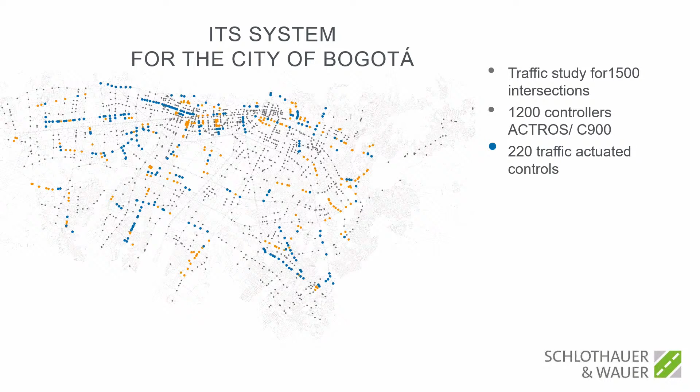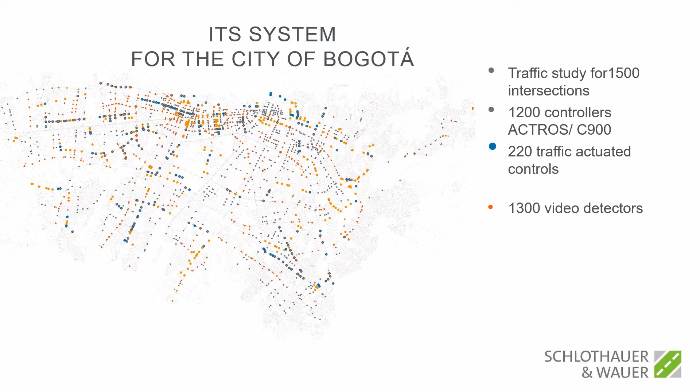The result was 220 traffic actuated controls and 1,300 video detectors, and also 50 coordinated corridors, which belong to 58 adaptive networks that are controlled by INES, which is the topic Torben will explain to you. So go ahead, please, Torben.

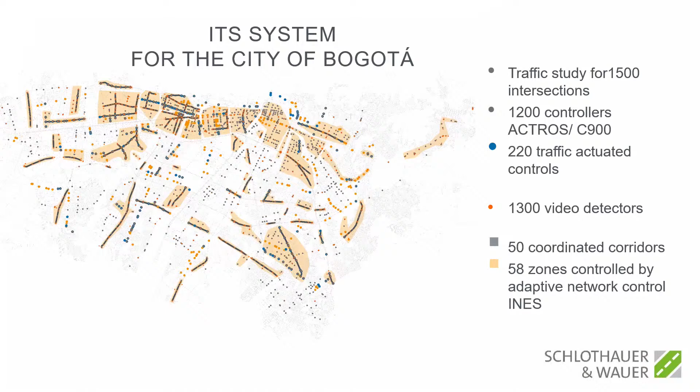Thank you very much for that introduction to the project. I also want to sum up a few challenges again that we were facing during the project, or that were also presented to us, which we had to deal with.

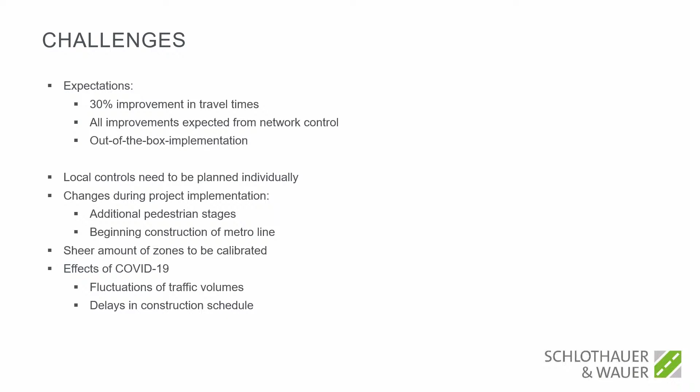First of all, there are the expectations of the client. As in many cases, when it comes to expectations towards a network control, there are some numbers circulating around the world of traffic management. We say that you could reach improvements of up to 30% just by re-regulating the traffic. This is an expectation that can hardly be met, except maybe in the case where the original state of a city was so badly managed that it's quite easy to make an improvement.

But as we know, and also if we see the situation in Bogota, the real problem of the city is a highly oversaturated network, and a public transport sector that still needs to be extended significantly. Anyways, we have to deal with these expectations and manage them over the course of the project.

At some point, the client is also expressing an expectation that a network control or intelligent traffic algorithm could provide something like an out-of-the-box instant solution, like buying an iPhone, connecting it to power, and a whole new world begins from the start. What it actually means to optimize traffic in such a big metropolitan area is hard and detailed work on the local controllers.

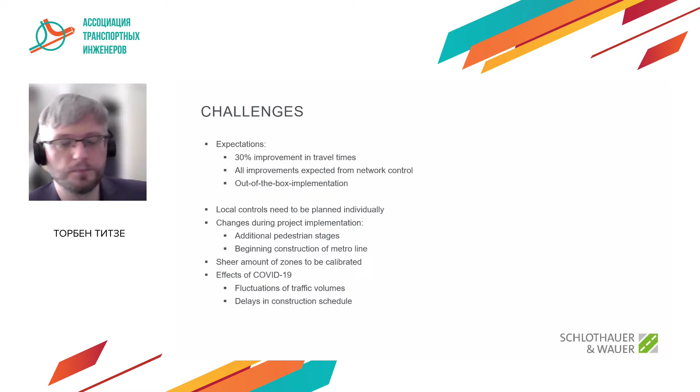So these are the challenges. We need a flexible system. We need a system that can also be worked with by local engineers. So how does our system adapt to these challenges? In short, what is INES? We will not go into all the details of what INES does and how it does it. I will just give a short overview of what it usually does and what we did, especially for Bogota.

INES is an adaptive network control system. Its main part is an automatic plan selection. It also does green time redistribution if the local control is supporting this. It's responding to congestion if we have speed detection, which of course in Bogota we had.

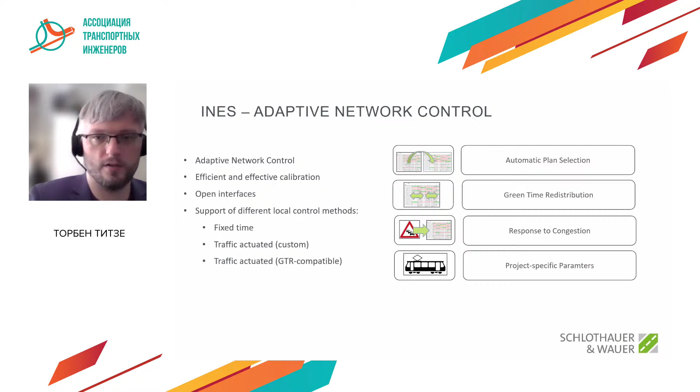What distinguishes it from other network control algorithms is that its control algorithm is independent of the control that is in the local controller. It is actually dependent on the local controller being programmed more or less intelligently already, having either a fixed time plan that has been engineered according to the local control, or a traffic actuated control that is customized. In our case, we had a traffic actuated control that implemented an INES specific interface that enables us to do green time redistribution online.

The system architecture, therefore: the INES server is an additional server. INES is not replacing a traffic central computer. It is communicating with a traffic central computer over open interfaces. OCIT is the current implementation, which is understood by the traffic centrals of leading market participants. What we do, we are requesting detector data from the traffic central, process it, and then give back desired program numbers or parameters to change the green times.

As I said, one of the challenges in the project was we needed a tool that could be calibrated fast. When you have 58 zones to calibrate over the course of 32 months, originally an 18 month project period, you need a system that has a limited number of parameters. We achieve this by using the saturation as our main control parameter, a unit that we try to optimize.

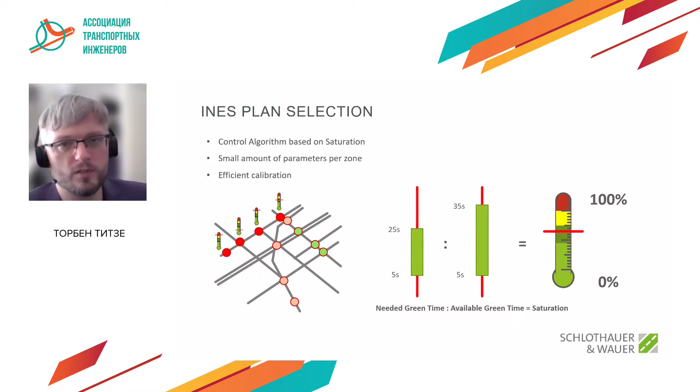For those of you not so familiar with green times or traffic planning on traffic lights, it is the ratio between the needed green time and the available green time at a traffic light, which means this value is independent of the number of lanes, of the cycle time at the intersection, or any other factors that might change the capacity. It is the ratio of the current traffic in comparison to the capacity. So when we are doing a calibration process here, we are faster than just changing thresholds like in other systems or those based on simulations.

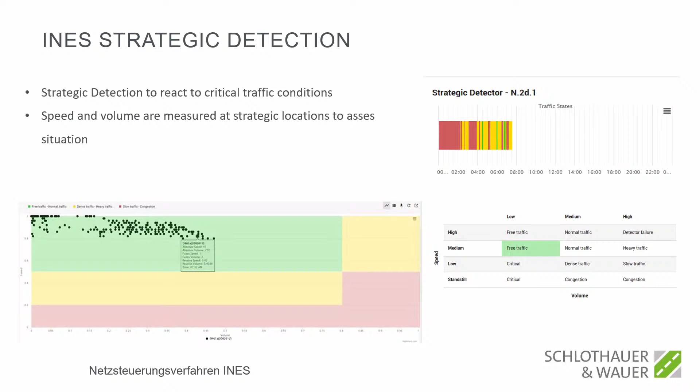INES green time redistribution: as I already mentioned, in our project we had the possibility to implement this interface in the local controls, meaning that although the local controller does the second-to-second green time split, or the decisions within the cycle, INES is determining the parameters on which these decisions are based. So when it comes to green time redistribution, you can say that the intelligence of our system is kind of divided between the local controller, also the local planning of the engineer responsible for the intersection and knowing the intersection, and the planner of the network level, of the macroscopic level, who is responsible for fine-tuning the strategy and the overall behavior of the zone.

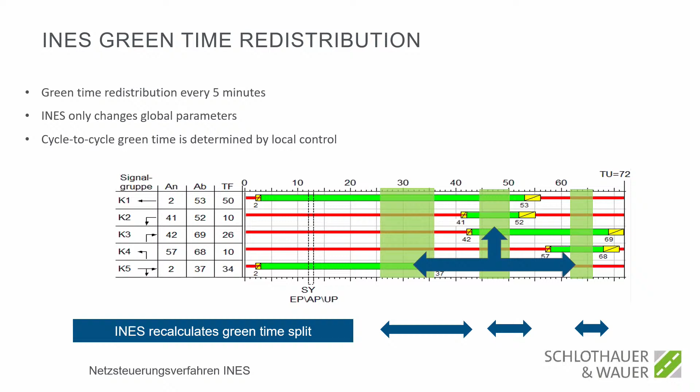These are all functionalities that we had implemented at INES for the last decade already. A new functionality that we developed, especially for the situation in Bogota, is what we called green corridor. The situation that we found in the city is that in some cases, on some vital arterial corridors, the saturation or the traffic conditions are getting so bad that the police regularly has to do interventions by just letting the main direction pass into the city.

And we found that we would not be able to work around this situation by just saying we ignore it. If the police is doing stuff like that, we are getting measured values that make it hard for our network algorithm to interpret what is actually happening, because cars are passing over a traffic light without actually respecting the traffic light because the police tells them so.

So what we did to work around this, we developed an algorithm that kind of automates this mechanic. So in the moment that we are already in the highest capacity program, and we detect still that there is tailback, although there is already no alternative to give more capacity via the traffic lights, we are telling the traffic light to ignore the secondary direction for one cycle.

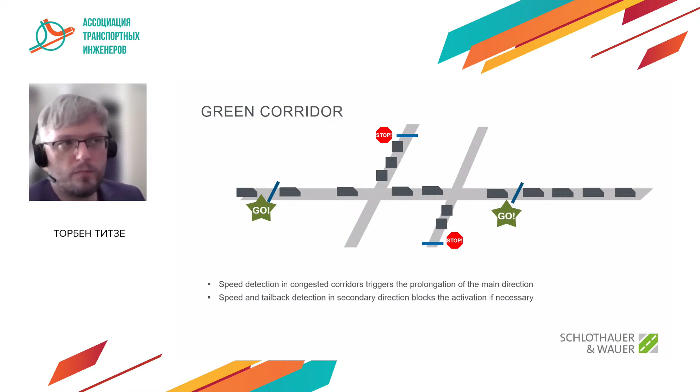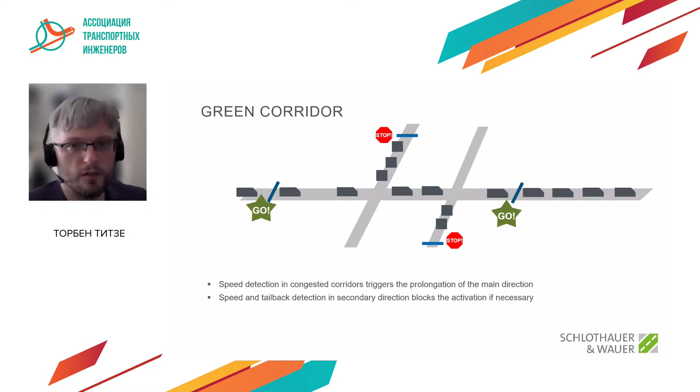And what we did with our algorithm is to check in these secondary roads if there is tailbacks building up, and if the tailback is reaching a certain point, we are stopping the arterial prioritization and only allow it if the situation in the secondary direction is not critical. So that, in short, is the description of our new implementation for Bogota.

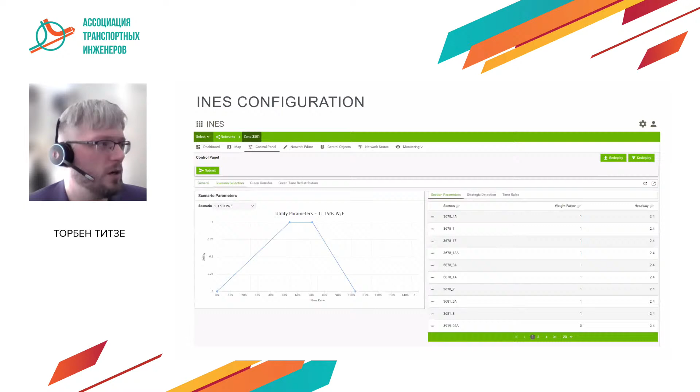Maybe just a few examples of how INES is controlled. We are having a modern web interface where the users can change all the parameters via a web browser when they have access to the system. Also, the parameters that are used for the decision and the green time redistribution can be changed here. We have easily understandable graphics showing the decisions of our network algorithm.

And also something that we developed specifically for Bogota, we were asked to make a before and after comparison, kind of justify that the decisions our network control is doing are actually contributing to an improvement of the situation. And to do this evaluation for the whole city, the easiest way for us was to directly integrate it into the algorithm itself.

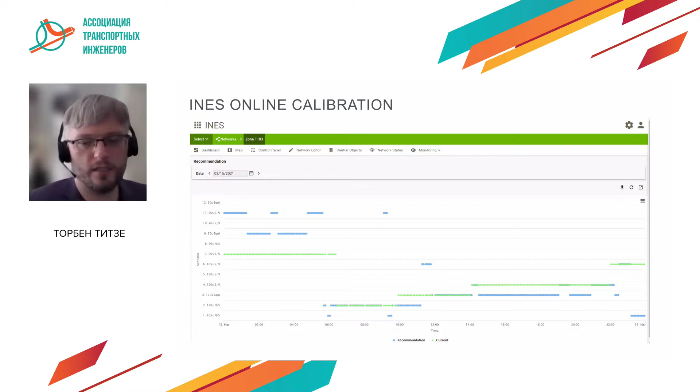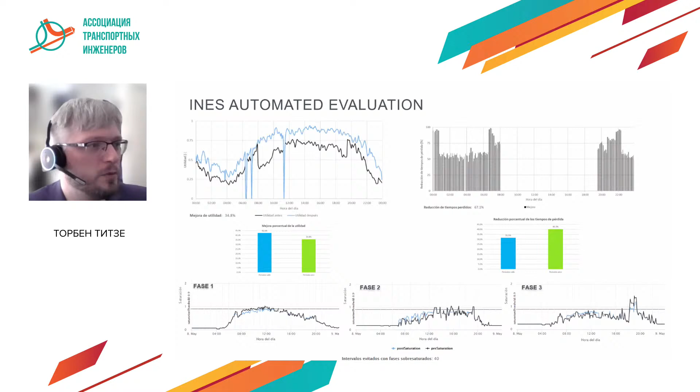So at the same time that our system is making decisions, suggesting new programs for the traffic central, it is at the same time evaluating these decisions and calculating values that show that we are reducing waiting times, that we are reducing saturations in certain phases. When you look at this specific example, you will see here an improvement of up to 40% in the coordinated corridor.

But I have to say, this is only for a certain corridor during certain hours. So usually, I would say the improvement that we are having in the lost time only in the main corridors is between 10 and 20% compared to what we have without a network control. So what are the results? We have improvements for pedestrians in off-peak hours. We have lost time reduction in coordinated corridors, what I said, between 10 and 20%.

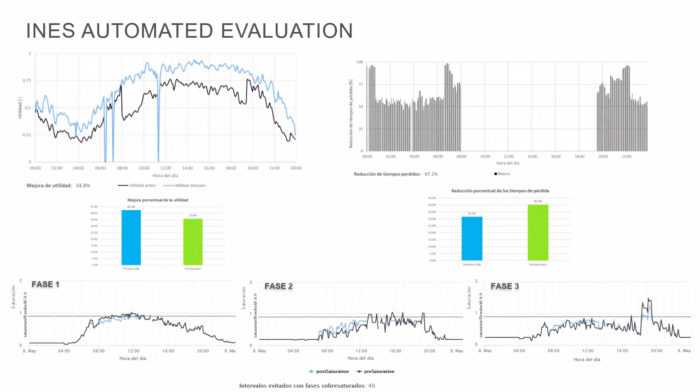Also, due to the nature of the project, there was a knowledge transfer from our company to local companies that we work together with, also to the local authorities. We were trying to make them understand how the system works. So what we do not want is a situation where whenever something is not working, they have to call Germany and make them fix the server. We want our system to be as accessible and maintainable so the local authorities can work with it and maintain it. And we also proved that INES is efficient enough to do all this calibration work within the schedule.

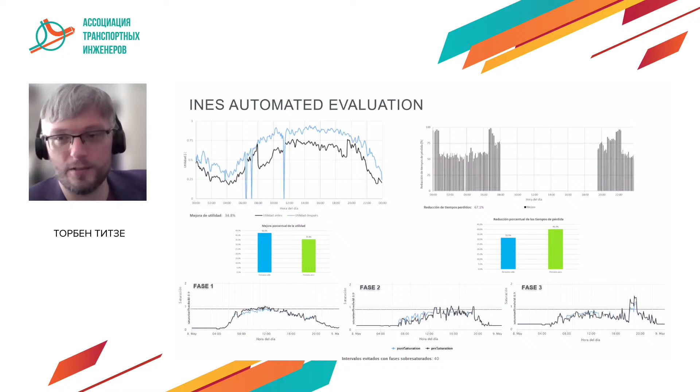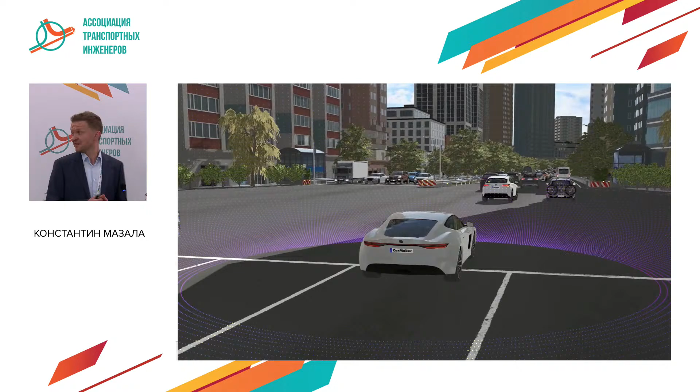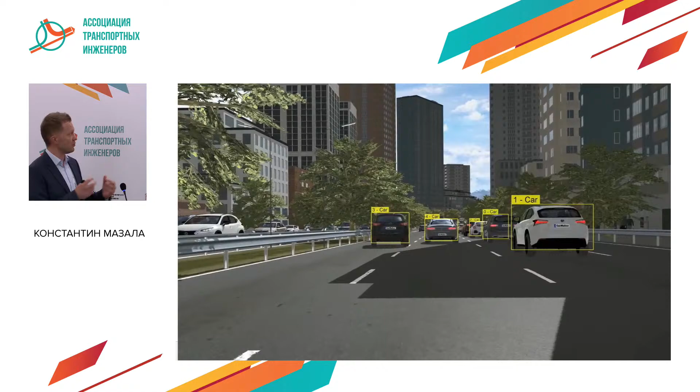A short video about our solution for you to better understand. Starting from this, you were using Unigine. Our CarMaker, our product, becomes a little bit of a Russian product, the so-called import substitution in action. With the help of external sensors, CarMaker provides this information about the sensors. It can localize itself, segmentation can be performed, etc.

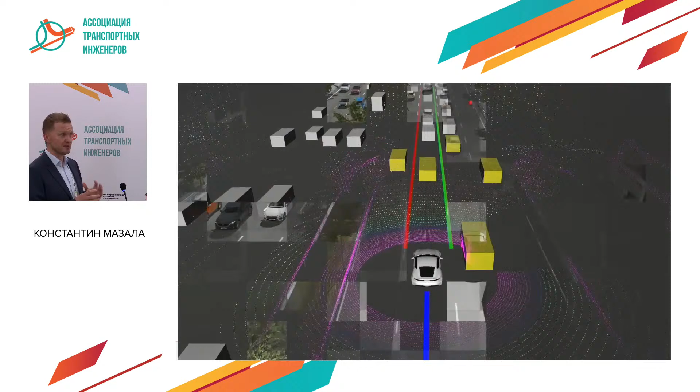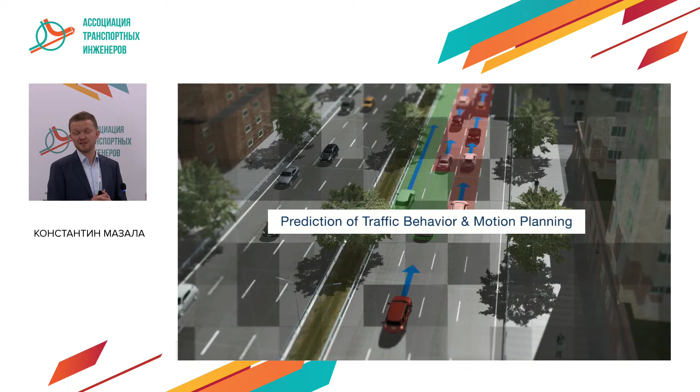But the vehicle and all the management blocks, plus, in addition, dense traffic, not very dense traffic, aggressive drivers or different degrees of aggressiveness of the driver can be adjusted. And thus we can also include unmanned driving as well.

Another important point is that the development of software and development of a vehicle has become one and the same thing today. Two worlds have merged to form one. And these technologies have been used for a long time. The task in terms of planning, calculation, and evaluation of traffic flows is taken into account as well. Special interfaces are being used. As for autonomous vehicles, unmanned vehicles, their participation in the overall traffic is still a task that we have to resolve in the near future. And Maxim will tell you more about it now.

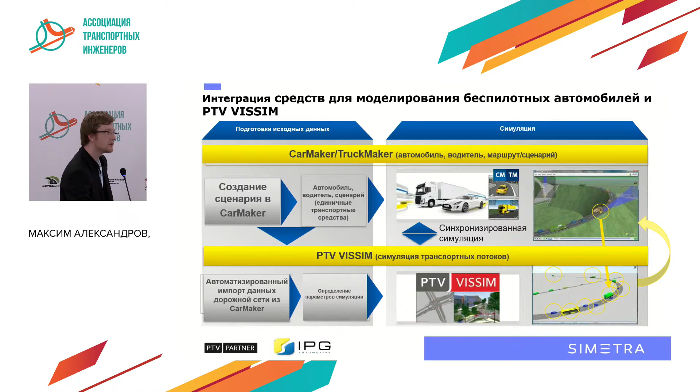With that, I would like to finish, and if you have any questions, you're welcome. I would like to use this chance and go back to the very beginning. The topic you've touched is really very broad and deep. We might have dedicated another 2 days conference to this topic.

I have a question to you, Konstantin. You've mentioned very fairly that modern vehicles have a lot of driver aids. For example, some brands now have a system that actually recognizes the road sign, and if the system is on, it doesn't allow the driver to drive quicker than the sign allows.

Is it not being discussed that for safety, there may be different zones, for example, zones for calming the traffic, or some other zones where the speed has to be limited? Don't you consider the so-called external managing? You install some roadside equipment in a very special zone where such a system is activated, and the vehicles cannot drive quicker than what is allowed.

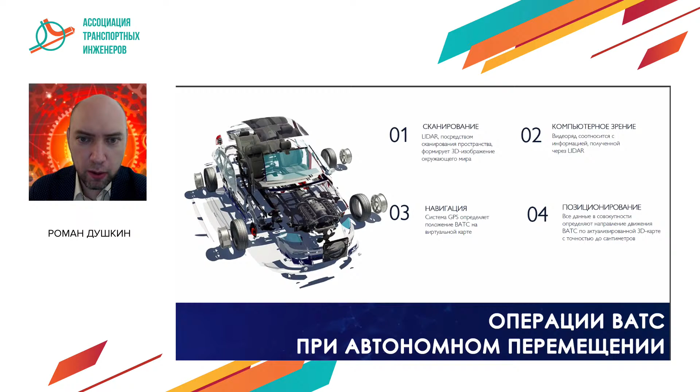We'll use the methods for building the ITS, multi-agent systems, so-called. They allow us to build special networks where the nodes are connected vehicles, and such networks allow us to cover large areas where there is no centralized coverage. This is very important to secure the connectivity of each VATS to their managing network.

As for types of interaction, there are four types: vehicle to vehicle, vehicle to central system, vehicle to infrastructure, and vehicle to pedestrian. And also car to infrastructure, it's another mode. In order to provide for a smooth passage through the crossing, we should use the methods of V2X and create one network for connection of the transport vehicles.

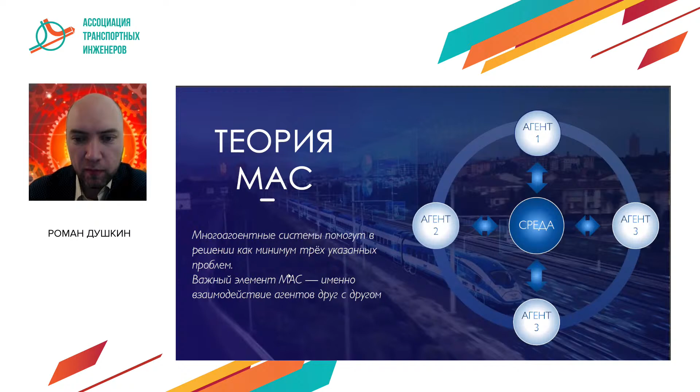One of the methods of artificial intelligence is reinforcement learning, and I'll show you how it works and where it's used. Multi-agent systems is also very important. Remember that agents acting in the road street system have to deal with lots of multiple problems, like ants and an ant house.

As to the methods of autonomous control of crossing, you can see the comparison methods, pros and cons, advantages and downsides, and the presentation will be available for you. Both centralized and decentralized methods of autonomous operations of traffic lights and crossing over have their advantages. We can use the hybrid approach for that centralized scheme of operations.

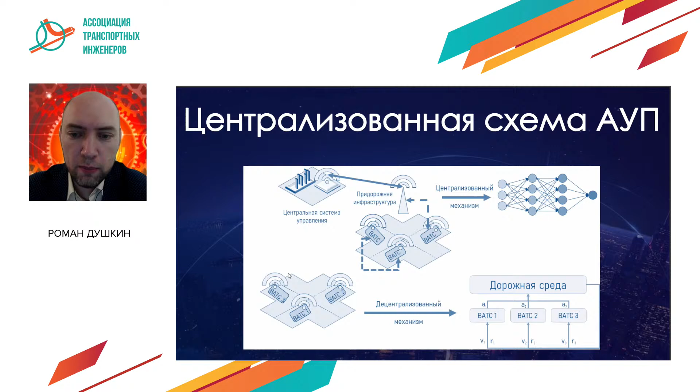It is based on a platform, which is part of a uniform platform of the traffic system management, that can calculate speeds of non-stop passing of traffic lights in a centralized way for all the cars to reach equilibrium, and then pass on the information to different cars. It's reinforcement learning.